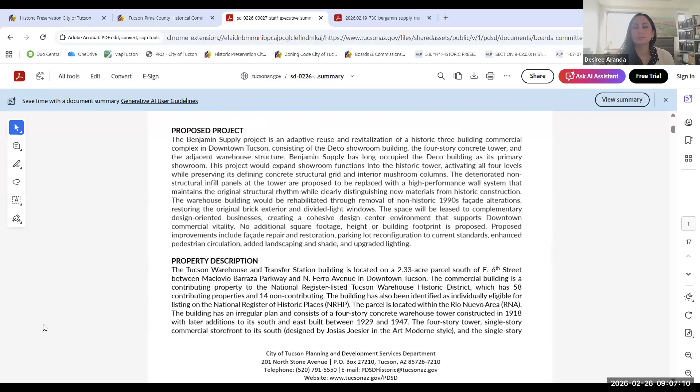Let me share my screen. This is our staff executive summary. It has a 4-story tower building, and also a kind of Art Deco, 1-story Art Deco piece. Can you see it now? Yes, okay, thank you, you're welcome.

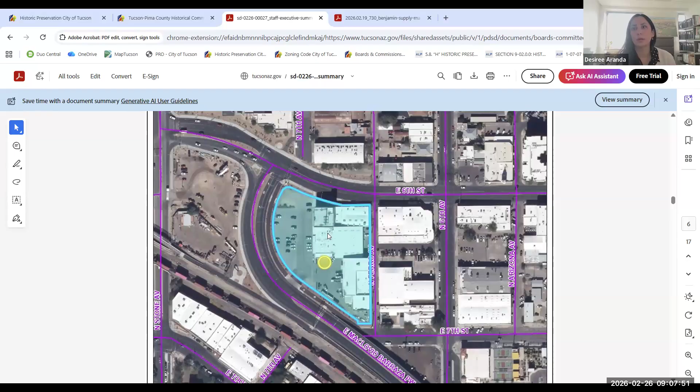I have some photos. Here's the parcel, as you can see the building is quite large. There were different additions added over time. This part here is the tower, which was the oldest part of the building, and there are different additions added over time. The subject pieces we're looking at today are this tower, this 1-story piece right here which was added over time, and then this commercial 1-story portion here.

We have the inventory forms also in the packet. Again, this is the tower piece we're looking at, and this Art Deco piece that was reportedly designed by Josias Joesler. There's the tower, and then this piece along 6th Street has been heavily modified over time, so we don't know exactly what it originally looked like, though we have some photos.

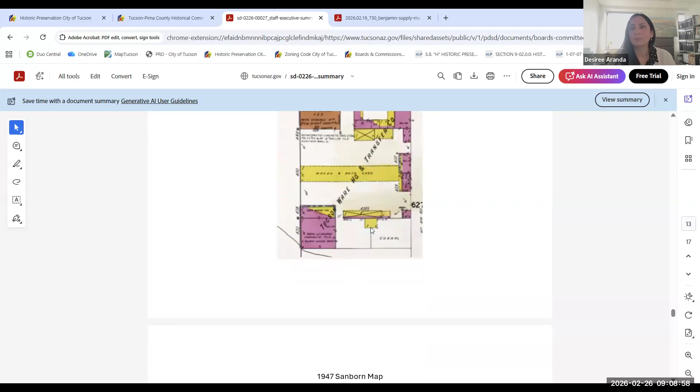Those are kind of the pieces that are not character defining, and we're not concerned about them during this review. This is the original inventory form, an older version. There are some Sanborn maps that show the evolution of this building. Just scrolling through - this is an image from circa 1929 to 1933.

This is that kind of commercial storefront that had been altered. 1950s and then 1994. 1999, I think that's the last one.

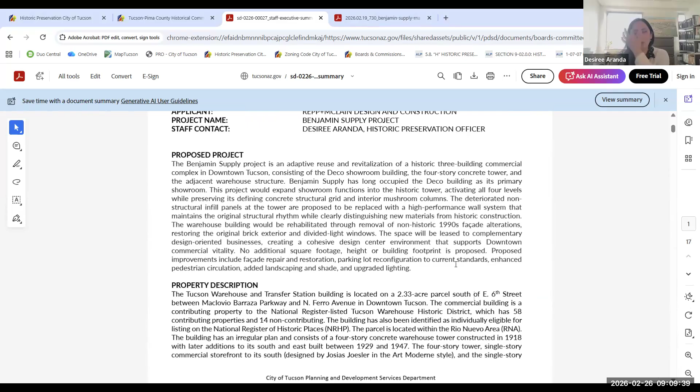So just wanted to give you a little bit of context for the building itself, what we're looking at. The project sponsors are here to present their project, so I won't go into all of the details, but I do have some comments maybe after they present the actual project. So I'm going to stop sharing my screen.

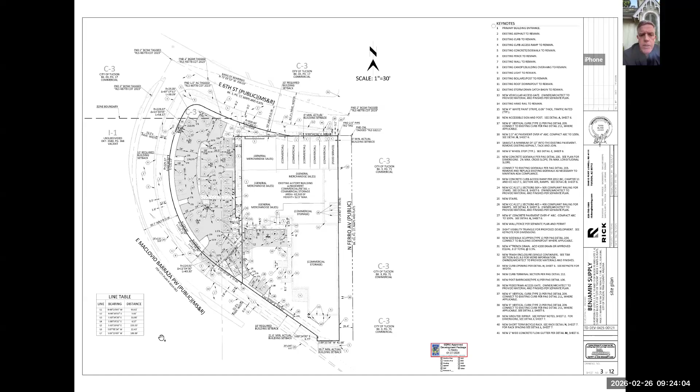Paige, Shane, anything else I missed on that would be helpful for these guys to know at this point?

I think you got that. Okay, great. Yeah, that was a great summary, I think.

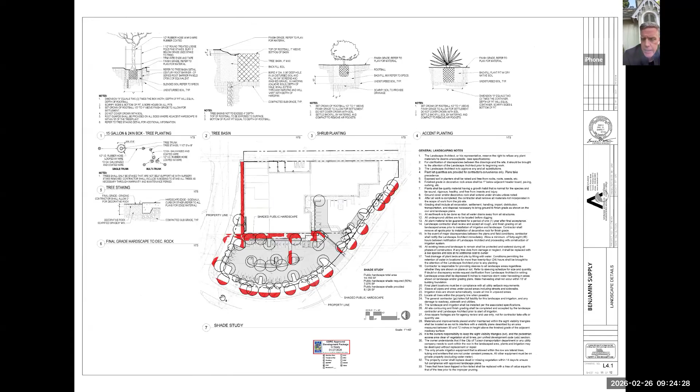Some of these other documents, this was the same document that we used for DRB as well as PRS, so you can see the shade study and some of the development plans and things like that. If you guys have questions on those areas, I'm very happy to discuss them. But I think you guys are probably more interested in the historic parts of the building.

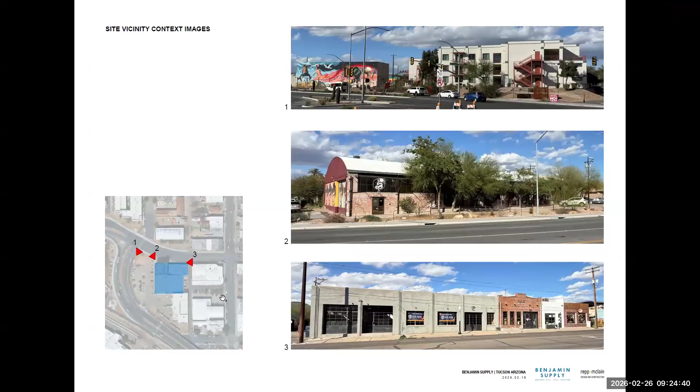Well, who knows what we might ask. But before I entertain questions from commissioners, Desiree, you had some comments.

Thank you. I just wanted to add or call your attention to a couple of things. As Rick mentioned, the work proposed on the kind of Art Deco single-story addition is mostly repair and repainting the side along 6th Street. The changes are more substantial, but there's also not that much evidence documentation on what we'd normally like for a restoration project. So I think the fact that they did some exploratory demolition was helpful.

I did have an informal conversation with SHPO as well, showing them the most recent plans, because this is listed on the National Register - it's not a local HPZ or HL. I did want to get their input, and it wasn't anything formal written up, just their initial assessment. They were not that concerned about those two one-story pieces. The area they had more questions about, or were more concerned about in terms of potentially losing its status as contributing, would be related to the glass windows proposed for that infill in the northwest corner.

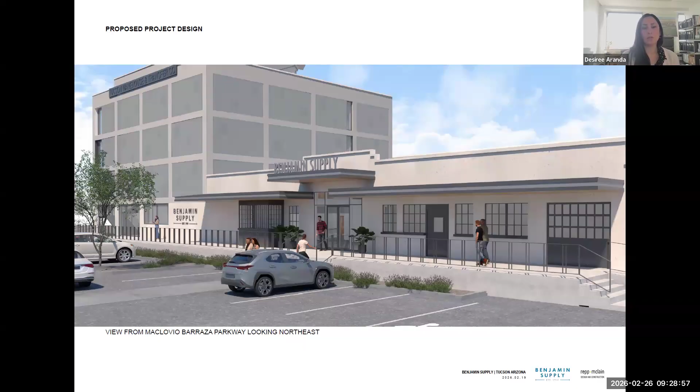Yeah, that was the other thing I was going to mention, the additional windows or changing of the fenestration pattern could take it to maybe non-contributing. And just for everyone's information, this is in the RNA, which does not require that a contributing status be maintained, but historic review is still required.

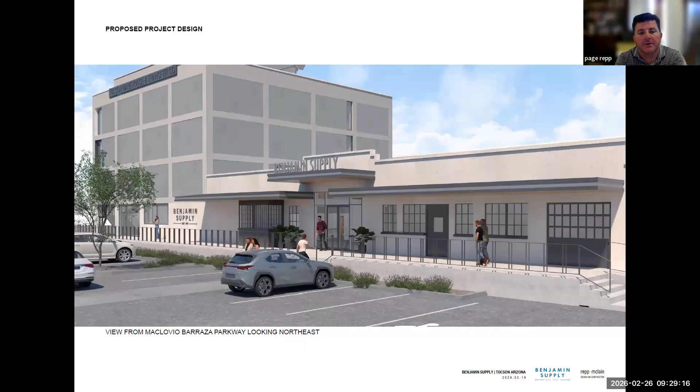One other thing on those windows, on that elevation the windows are behind the metal screen, and it's perforated, so you get the light, but from the exterior it recreates that monolithic nature of what it originally looked like.

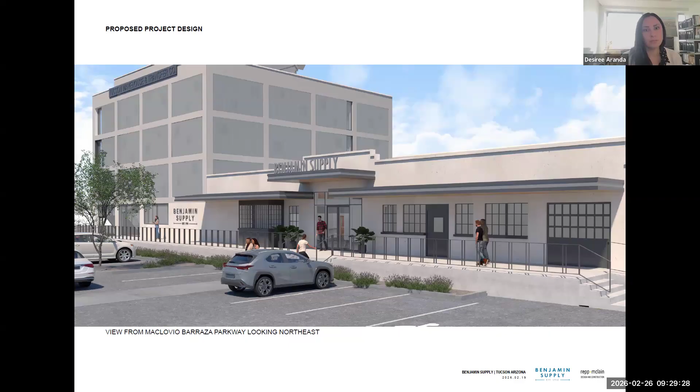Okay. Thanks for that clarification. So yeah, that's all I had. Terry, I'll hand it back over to you. Okay, thank you.

Commissioners, who would like to start? I mean, I just want to say that after all the city went through to list these buildings as part of a district, I'm hoping that your intention is to maintain its contributing status. Is that the case?

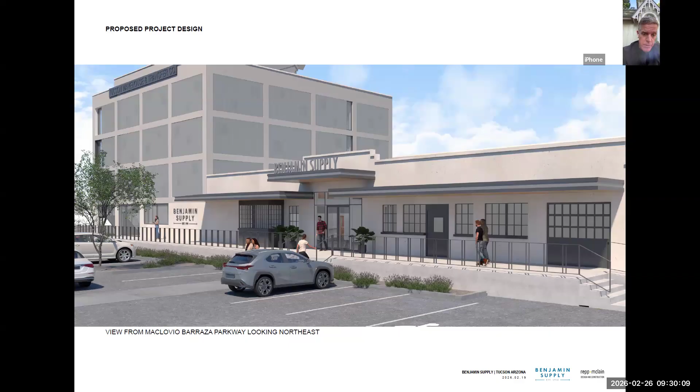Yeah, absolutely. We are hoping to maintain the contributing status on this building. We're just trying to find that balance between changing the use from a warehouse to retail and how we make this new business kind of viable in these existing historic buildings.

No, I understand that. And I have a question for Maria. So are we getting back in that cycle of DRB reviewing before PRS? Ms. Majewski, members of the PRS, no, the DRB is scheduled to review this project next week on March 6th.

Okay, perfect. Thank you. Okay, commissioners, who would like to start with questions? I can start off, Terry. Go ahead. Thank you. Yeah, thank you. This is a great presentation packet, by the way.

It has kind of everything we'd want to see in terms of the 3D renders and all of that, so thank you. I share Terry's concern, my predominant concern is that we can maintain the contributing status of this building. In Desiree's staff report, this is one of the historic districts where we have a growing number of non-contributors in the district. So we're not at a critical 50% threshold yet, but I don't want to get close to it.

And this is an iconic building too. So I like your rationale for what you've done. I understand the need to change use, and frankly, I'm pretty excited about it. I mean, when was the last time downtown had multi-story retail? Like 1980. So that's pretty incredible. I think if we have these broader goals of creating a livable, dense downtown, we need things like this. I think full activation of the building is great for its preservation versus 75% of it continuing to be mothballed.

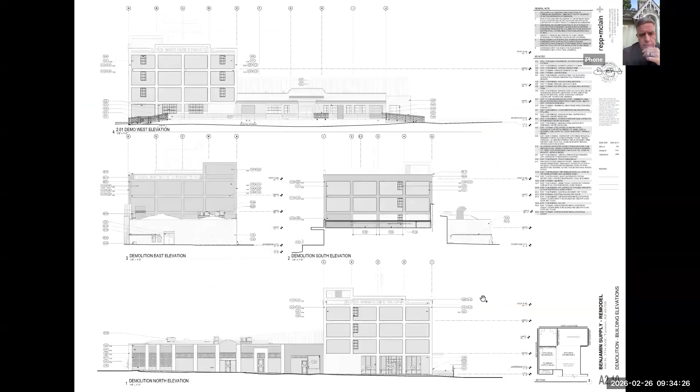Thanks, Savannah. That's the cornice work, and a lot of the little detail like that is kind of tricky sometimes to get into these kind of bigger models. But yes, the intention is to maintain all that kind of finer detail work that's on there.

Okay, yeah. And the only other significant feature, in comparing what it was before to now, is the punched openings, the windows that created a little bit of relief, a little bit of pattern on that fairly blank facade historically. So I'm wondering if paying attention to those, or finding some way to tell their story, would help with the argument of keeping it compatible or contributing.

Because what you've done is they're in pretty different locations, right? And they're kind of the full height of the bay, as opposed to what it was, a little more modest with the sill punched openings originally. Yep, they were certainly a little more modest with the sill. I can't speak to their original intention, but obviously a warehouse use is very different from the retail use in there too.

To follow up on the glass section for that corner opening, our thought process was that because it's such a predominant grid system with these infill panels, our reading and understanding of the two service bulletins from the Secretary of the Interior's Standards was that we should, rather than create a new proportion or scale or rhythm, let it have a singular punched opening on the same plane that exists currently, no trim, no ornamentation. So I think by having the glass be that full system, that helps maintain the existing grid system reading correctly.

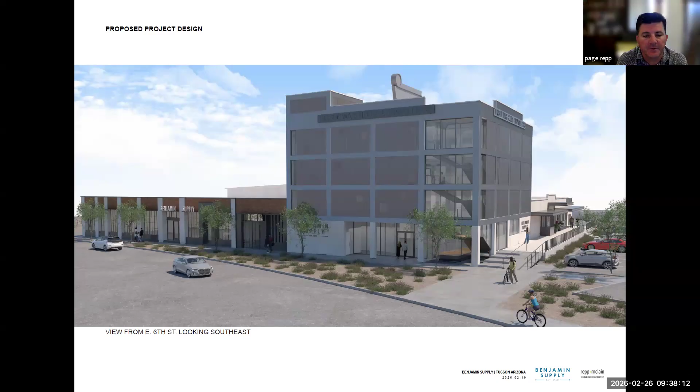Yeah, I think I like that. Peeling back that 90s facade, I think helps a lot. Revealing it looks good, looks better. That's all I have right now.

We'll listen to other commissioners, but thank you. Thanks, Savannah. Blake, what about you?

I have some comments, and I'm going to try to keep this brief. The way that this presentation led off seems to have triggered something emotionally in me, so I'm going to try to respond without letting that come through, and it will be something that I work on going forward.

The contributing status of the building needs to be the priority, that it maintains the significance and its contributing nature to the district as a whole. Of course, so I agree with Andrew and Savannah there.

As the landscape architect on this subcommittee, the areas of concern for me are limited because it's downtown, right, or downtown adjacent. So there's not a lot of historic landscape that needs to be thought about. But part of any landscape is naturally the view sheds of and from any structure and any site.

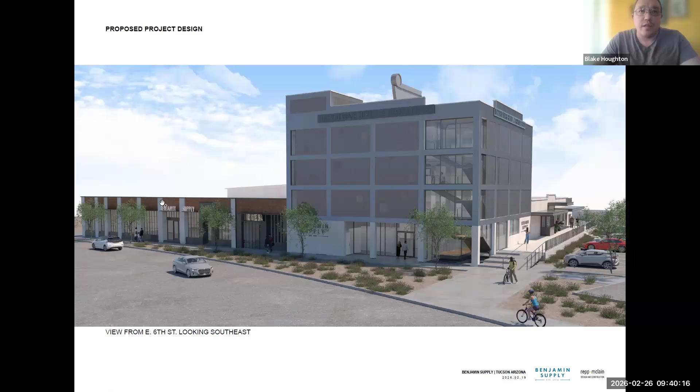What my biggest comment would be on is irrelevant, as it is the removal of a non-contributing feature that is already in progress. So that's what I have to say.

Okay, thank you. Commissioners, if we don't have other comments or questions, then I'm looking for a motion. Terry, can I ask one more? Yeah, okay, go ahead.

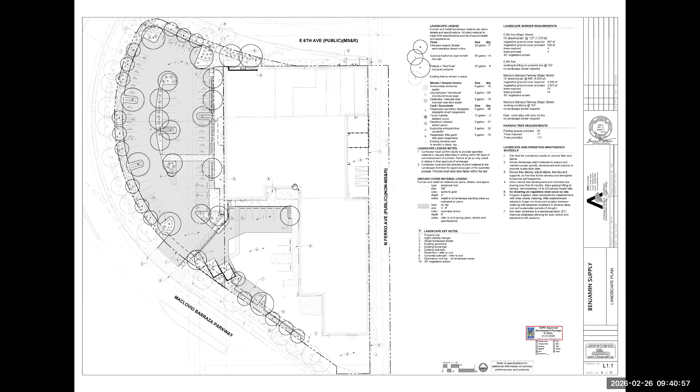Savannah had brought this up, and it was a good catch. On the northwest corner and on the northeast corner, from the inventory form, there were the kind of carriage doors that led into the bottom floor of the tower portion. They've been infilled since, but on the northwest corner, that cornice detail is still there. And then on the northeast corner, the jostle stones or whatever at the jambs of where those doors were are still present, where they stick out of the wall.

So have you guys done any kind of exploratory demo in there to see how those were infilled, and could they be opened back up again? The reason I bring it up is if we're looking for this transparency and getting more light and visibility into the building, those were the two primary large openings.

So I'd like to see maybe an effort to retain those elements, and maybe it's a glass infill versus a solid door or something. But I think for such a simple building, those are really one of the few architectural elements. And if we could retain those, I think I'd feel more comfortable that we'd have a shot at keeping the contributing status.

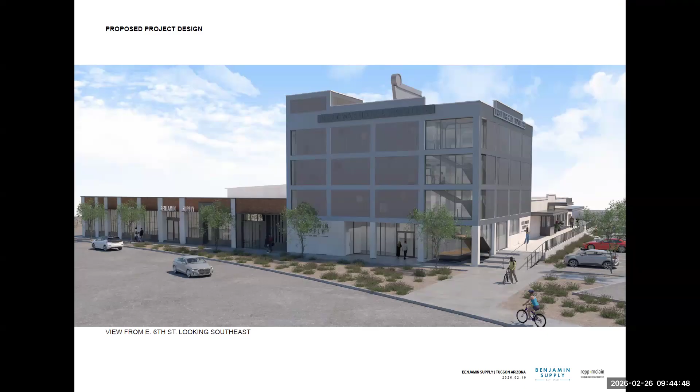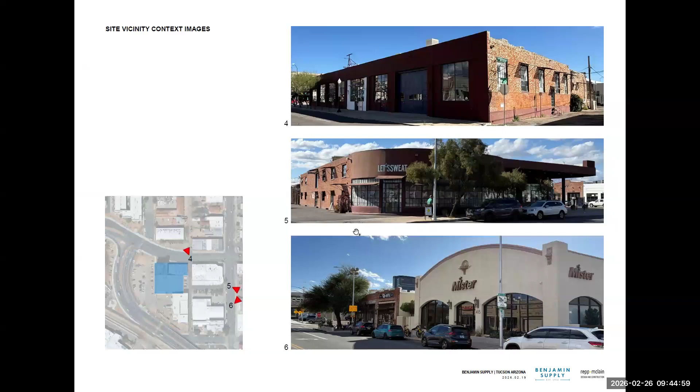Correct. Yep. The northwest corner one, the one that faces west, is that a similar situation, or is that one maybe more open? It looks like you're going to open it again and put glass in, but there's that cornice detail in the wall there that I think would be really great to keep. That was probably a primary entrance at some point. Yeah, it was hard to - yeah, absolutely. But I think per Savannah's comment earlier, that probably didn't quite make it into the model at that point, but it would be our intention to keep that piece in there.

Okay, alrighty. And then the sign on the roof, are you retaining that, or is there plans to restore it? Yeah, go ahead Paige. There's two signs up there. The large sign on the roof is in terrible shape, so we can't work on it up there. So we're going to remove it, lower it down in the parking lot, and we're having Jude Cook look at it to repair it, their initial look and restore it. Their initial estimate was that it's going to cost somewhere in the 6-figure range, but the owner's intention is still to bring it down, fully explore what it's going to cost, and if it's affordable, even if it spirals up to $185,000 or $200,000, their intention is to restore it and put it back up on the roof. So we want to keep that, and then the Tucson warehouse and transfer signs, we will restore those too. That is our intention. The signage is a huge part of the building, and if we can restore it, we want to. Did I cover that right?

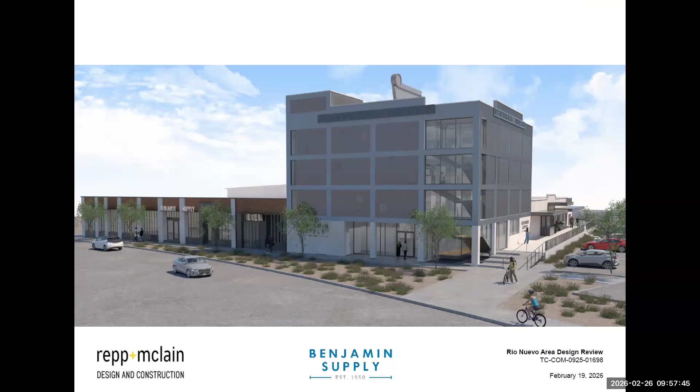Yeah, and I think we should always loop Desiree and her office in, so that applicants aren't continually sidestepping the HPO and going straight to SHPO. I think that's appropriate for Desiree to communicate with SHPO about the issue. So that's my thought on that.

And I think we do need to say other things in the motion, because Maria's going to want it right away to go to DRB so they have our feedback. So these smaller things that we're calling smaller details, I think need to be called out in the motion.

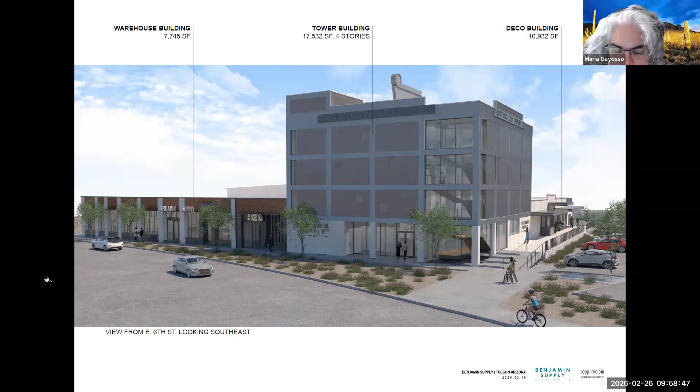Ms. Majewski, members of the PRS, and also a question for the applicant: if they go back to the PRS for a minor review, and if they provide those requested revisions today, if all that minor—if the applicant is able to provide the new drawings pretty soon, how quickly could the minor review be done? Could that be done prior to Friday next week?

Just so we're cleaner going forward with the DRB, I'm just trying to avoid going back and forth at this point. We can get them done pretty quick—it would probably be me or Savannah doing it, and I'll turn them around in a day or two.

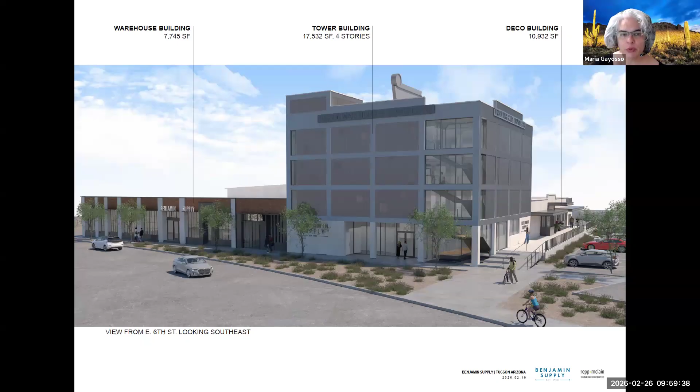Okay, great. So, Rick, Paige, we'll see what the motion comes up like, but if you could provide those revised drawings early next week, that would really help. Absolutely. Thanks, Maria. Yes, we can get those drawings ASAP.

That's not a concern at all. I did have one quick question, maybe a clarification, because this is a PRS review based on specific criteria. When I talked to SHPO, because we had other projects going on and couldn't find early information, she was helpful with research. She mentioned that since this isn't a listed property, SHPO doesn't actually have jurisdiction here. So I'm struggling a bit with the idea of SHPO weighing in on this, since I've never seen that be part of the criteria for a PRS review. I thought they were two separate streams.

Well, they are separate, but we sometimes request it. Over the years, when it's a serious issue, SHPO would be responsible if this building were delisted, that's a SHPO function. But Desiree, the historic preservation officer for Tucson, is a very important piece of this and is often a conduit for questions to SHPO, which tries to stay back from these decisions because we have a knowledgeable officer in her department.

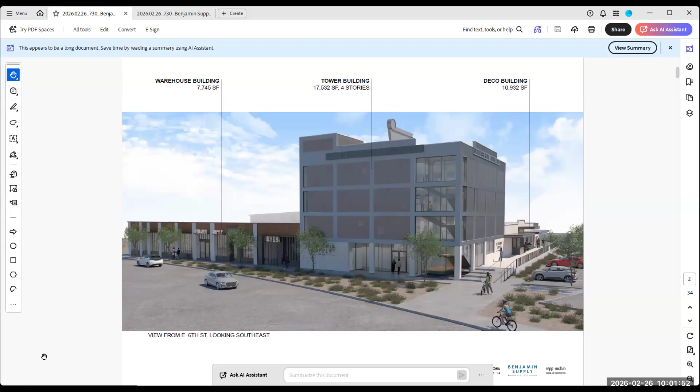So anyway, let's please make this motion because we have several other items to attend to. And just one last thing, Maria, this is a complex case. We only started hearing about it when a commissioner complained that things were happening to the building that we hadn't seen. We got this on the agenda quickly to make it easier for the applicant, since you've got it scheduled for DRB, but these are complex projects and we will not be forced to make quick decisions if we don't feel comfortable.

So, okay, Andrew or Savannah, someone please make a motion. Okay, I've got one written up. Let me just get the case number in here real quick and I will do that. Okay.

On the matter of item 4A, case SD-0226-00027/TD-DEV-0425-00121/TC-COM-0925-01698 at 440 North 7th Ave, I recommend approval of the project as presented with the following conditions: 1, the existing cornice detail and evidence of carriage door openings should be shown on the northeast and northwest corners, and revised elevations provided for minor review. 2, PRS is generally supportive of the new glazing system and infill walls, but the extent of new glazing is cause for concern that contributing status may be lost. 3, the applicant is encouraged to further discuss the glazing and infill strategy with the City Historic Preservation Officer and the State Historic Preservation Officer to ensure contributing status is maintained. 4, the historic rooftop sign location should be thoroughly documented before removal so it can be reinstalled in the future after restoration.

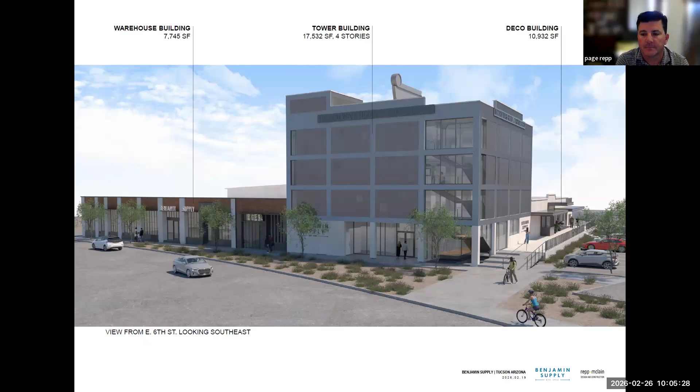So we will continue to make those arguments and pitch and present that case because we feel like the way we are presenting this is the correct way. And we just don't want this thing to be mothballed for eternity. I'm worried about our clients saying we'll ditch the second, third, and fourth floor. I think that's unfortunate if this thing just becomes an empty shell. But we'll see what we can figure out.

Well, it seems like everyone is moving to have these reviews as quickly as possible. I think you could mention to your client this is an important district, an important building for the community, and everyone's bending over backwards to make it possible for your project to move forward quickly. I'm sure they've been very reasonable, so I'm sure they will understand the review sequence.

So, okay, well, thank you again. Go ahead. Now you have PRS approval, so you're one step closer. I feel like we're just... Right. Yeah.

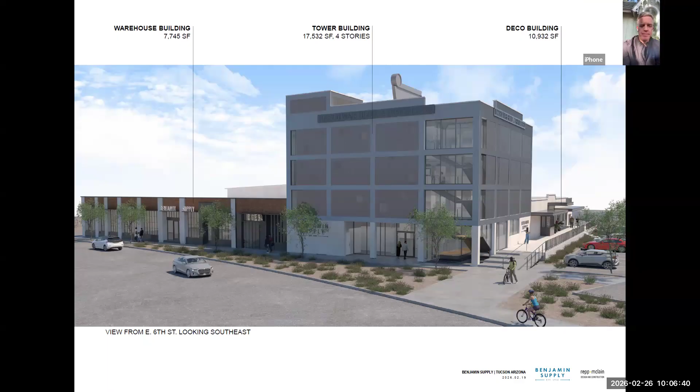Okay, let's move on to item 5, which is historic landmark nomination review. 5A is TC-COM-0226-00203, 255 West Alameda Street. It's for Tucson City Hall. Jason, it looks like you are the contact on this.

That is correct. Thank you, Terry. Could you give us a presentation? Desiree, would you please enable me to share screen? Terry, I know we're running short on time, how much do you want me to keep this down to? I have a slide presentation, but I can cut it down to whatever time remaining you feel we have left. Well, when does everyone have to get off? I was hoping our meeting would be an hour and a half today, but if we need to move this forward, we need to move it forward. How many slides do you have?

26. What do commissioners desire here? I'm okay on time, I got someone to cover my 10 o'clock, so I'll defer to others. I have till 10:45, I have to get to campus. Okay, that's good to know. I think we need to go because we have another informational item and we need to wrap up. I appreciate everyone being on this meeting earlier in the day. So yeah, thank you. Okay, well, if you can zip through. I will do my best, I will try to keep it a brief history of City Hall rather than a forced march.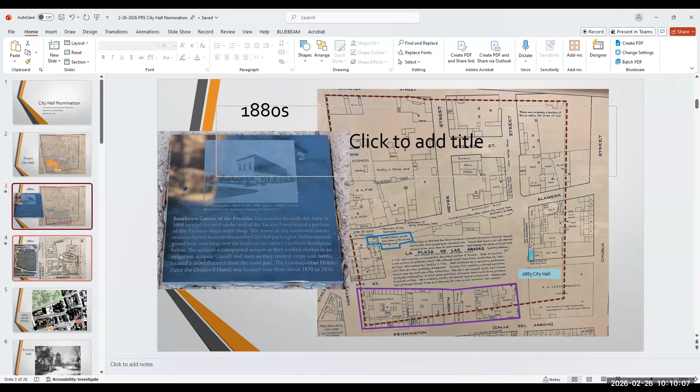Looking to 1883, where the 1916 City Hall once stood, before that was a Presbyterian church, as the plaque shows, and then it was sold to a Congregational church. I'm showing this in relation to where the City Hall was in this bigger area, but this Congregational church and the 1916 City Hall site is not part of the parcel we are looking at for the nomination.

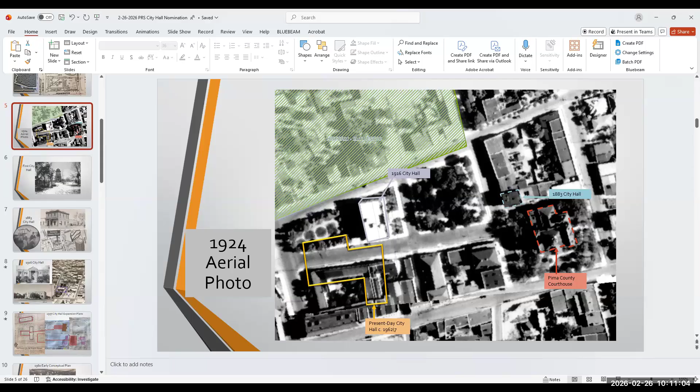Moving forward to the 1924 aerial photo, I've tried to outline it in yellow gold the best I can. What is shown in light purple is where the 1916, 1883 City Hall was, and you can see where the Pima County Courthouse is. This 1924 photo is right before Pima County decided to demolish all the existing structures and build the structure we know today. There's a street running through it.

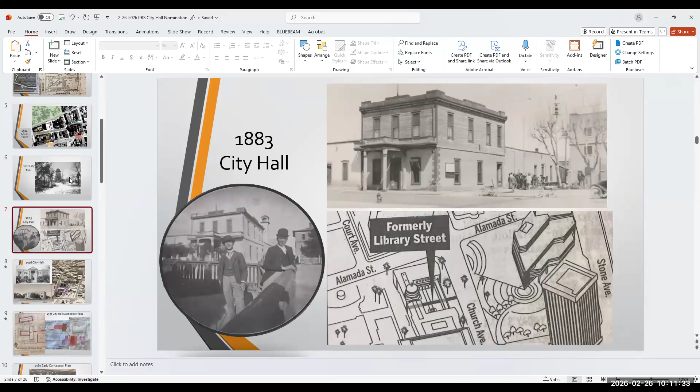This, if you remember, was highlighted in blue, the 1883 City Hall. I found in the lower right a newspaper article where that street running through shows people congregating with bikes to the side. It was called Library Street. It is now the walkway between the Pima County Courthouse.

So then we moved to the 1916 City Hall. Again, as I was saying, this is the parcel that today's City Hall is right adjacent to, but the 1916 City Hall was sitting on a different parcel, and this was demolished once the complete Tucson City Hall was built and everyone could move their offices into the new structure.

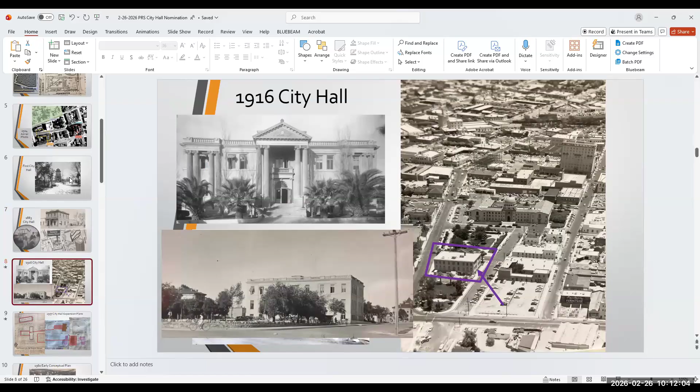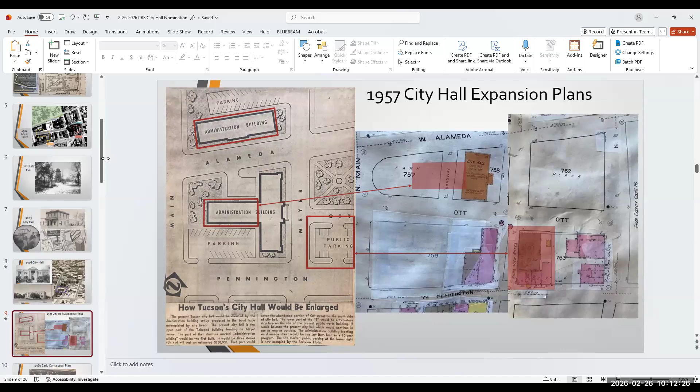Moving on, this is just a little background: at one time in 1957, they had thought about taking the existing 1916 City Hall, building a wing extending to the west, and then building an administration building across from it on Alameda Street. These plans did not go through, and this was through bonds.

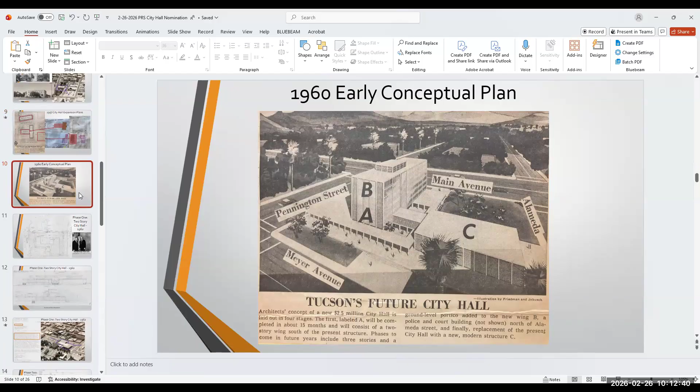Now, the bonds did go through, and we have an early 1960s conceptual plan. The building labeled C was to build a new structure using the old site of the 1916 City Hall.

Moving forward, here's the plans from 1962. You can see the City Hall, there's Sunset Park, and where my cursor is, you can see just how close the existing City Hall was while they went and built. I'm using my cursor to go around it.

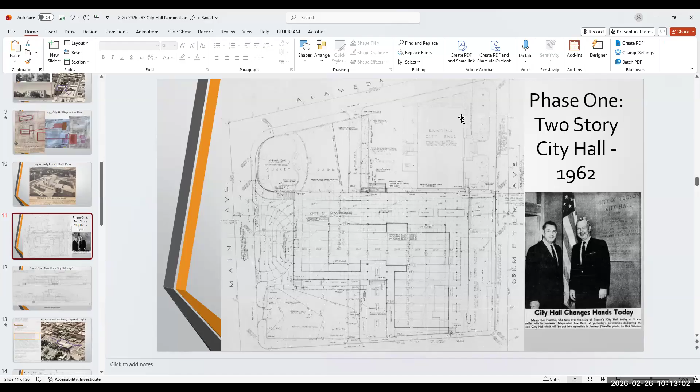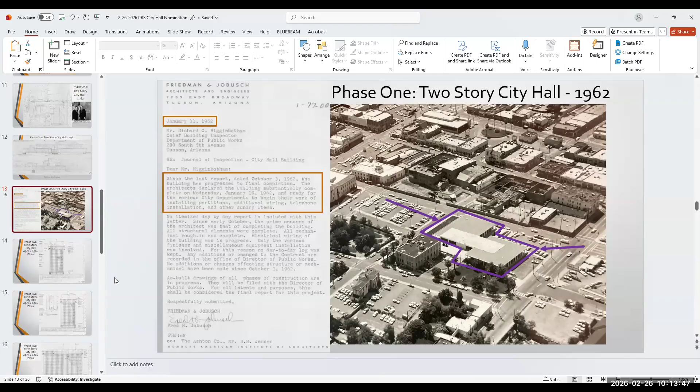Here I have an aerial photo where you can see how it was constructed. It did take a number of years between 1962 until we got to the tower that we now see today, which was finally approved.

And so here I have elevation plans. These were approved April 1st, 1966. We're looking at the west elevation. This is what we see currently today.

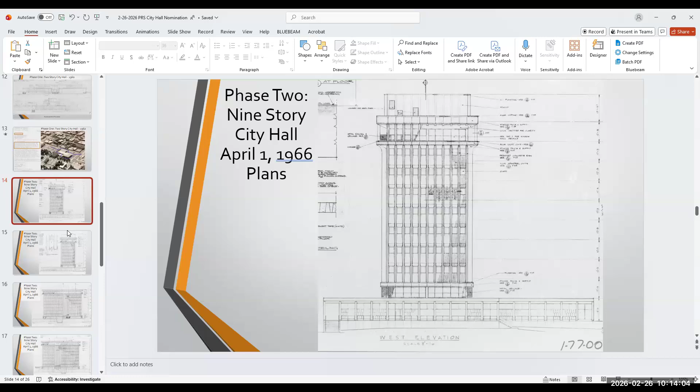This is your east elevation. This will be the south elevation. And the last one will be the north.

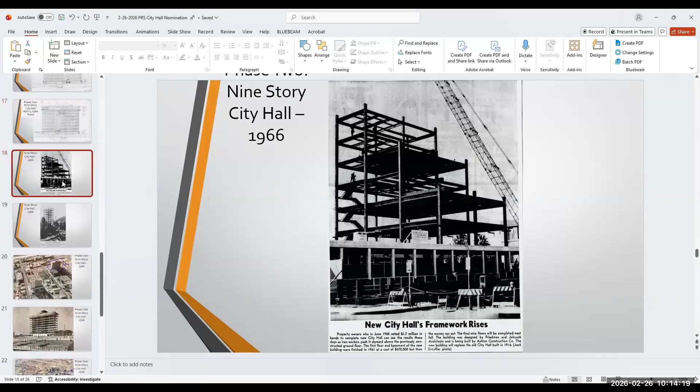Now these are the plans. I have historic photos of the steel framing going up and the construction of the 9-story tower. I have some aerial photos too. You can see how it's being built adjacent to the existing structures.

At the same time, I'll mention that urban renewal funds started to take away some of the old buildings here, extending to the south.

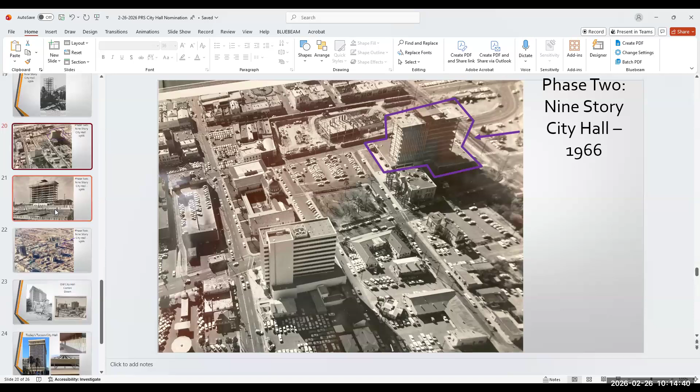This would be looking to the northwest, showing the old buildings demolished during urban renewal. Here's a colored photo, shown enlarged, where you can see the urban renewal area; the Tucson Convention Center will be out here.

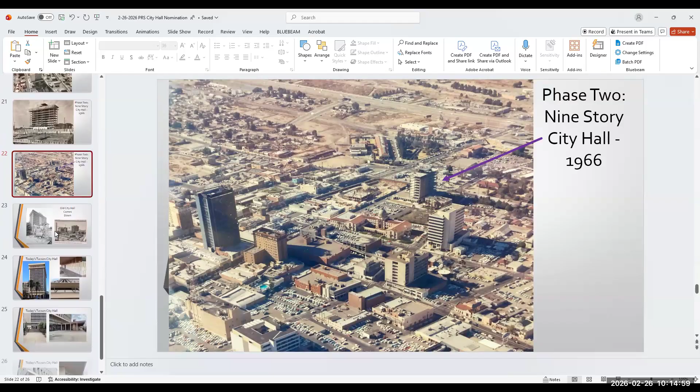Once they had finally completed construction, I found historic photos of the old 1916 City Hall finally coming down. I found a newspaper article that even though there's much nostalgia about it, they said it stunk because it had so many problems and issues since it was first built in 1916. Even though they had nostalgia, they were happy to move forward and have something new and modern.

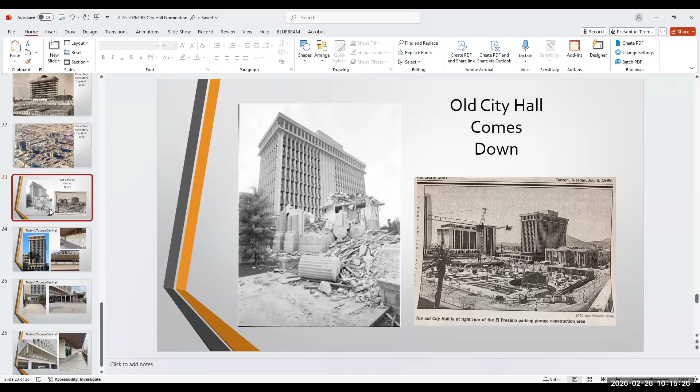So going back to the December 11th, 2025 PRS meeting we had, there were some concerns and issues raised regarding some of the architectural features, so I have those enlarged.

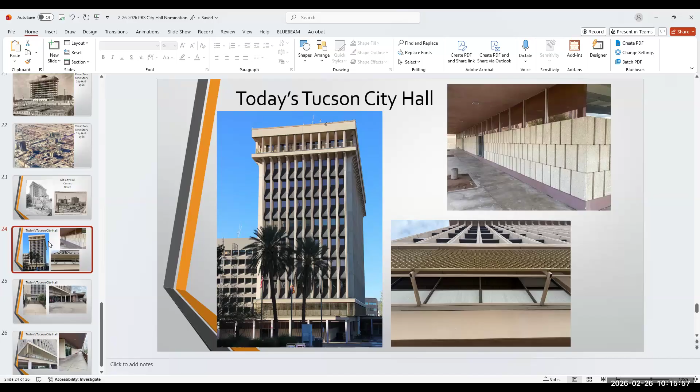What we are seeing in the upper right-hand corner is a cast stone fascia, according to the plans that were mentioned. I have a photo looking up at those anodized rings, and you can also see those aluminum windows with the mullions. I have other photos that will show this a little bit better.

The image on the left shows the parcel, which has a small segment that juts out towards Alameda. This is looking at that parcel with the acorn Steinfeld street lamps leading up to the entrance of City Hall. The last image shows the aluminum windows with mullions, the anodized gold rings, and the cast stone fascia.

I'd like to bring out a summary of the character-defining features. It is an irregular plan, 10 stories in height, horizontally oriented with a 1-story ground floor and a vertical 9-story tower. It has steel beam framework, cast concrete construction, cast stone facing, stucco fascia, covered walkways with concrete floors, and ground level lobby entrances at the north and south.

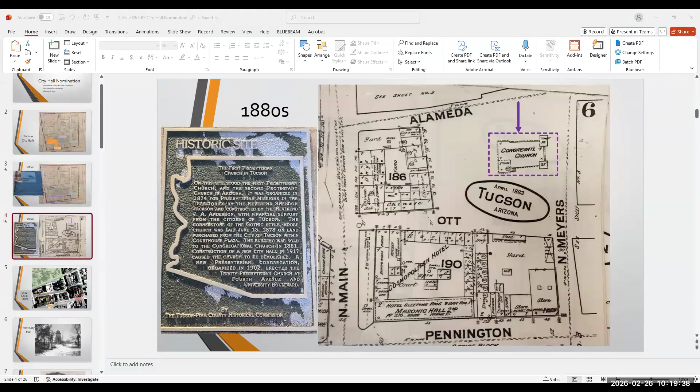Okay, let me see, I have an image for it. It's in the packet if you want to pull it up, or I can also share. Let me go to it, there it is, and let me throw it on screen. If you don't see it, I'm going to need to reshare screen. Yeah, you'll need to reshare, I think. Okay, give me one second.

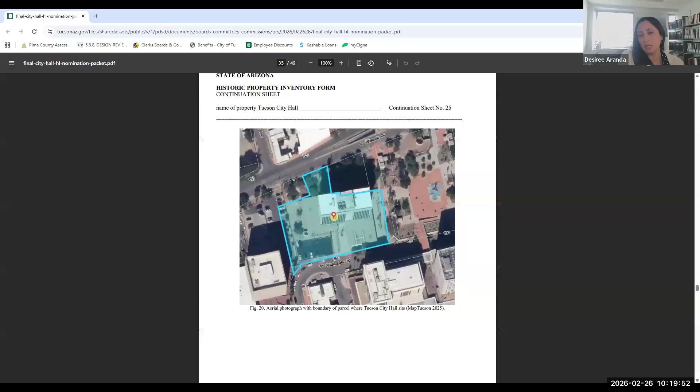There we go. While he's sharing, I'll just say generally speaking, historic landmark boundaries are the parcel because it's a rezoning of that parcel, so it's an overlay of whatever that zoning is. If we were to expand beyond that, we would be expanding into other parcels. In conversation with department leadership, and also based on the period of significance of that building itself, it makes sense from a historic preservation standpoint to keep it to that parcel, because anything beyond that would require conversation with mayor and council. That wasn't the direction, to expand beyond this parcel.

Okay, very good. So that little northeast parcel, where the former church and former city hall was, is separate. And I think it was called Sunset Park in the original plans, on that northwest corner, is also separate. Yeah, so they're separate parcels, and they've also been altered over time. As we took a look, there really isn't anything from the period of significance that's left.

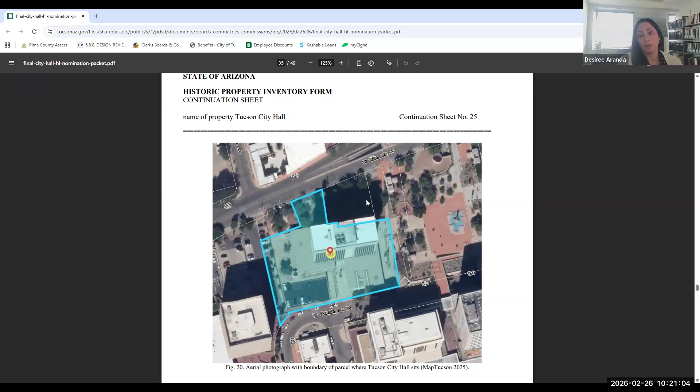Okay, so I have a question before you continue, Andrew. Is it because of the perspective of this drawing where the building is set that the boundary encompasses the entire building, or is it just the way this looks? Yeah, it's not totally accurate, but it kind of reflects the limitations. The whole building would be included.

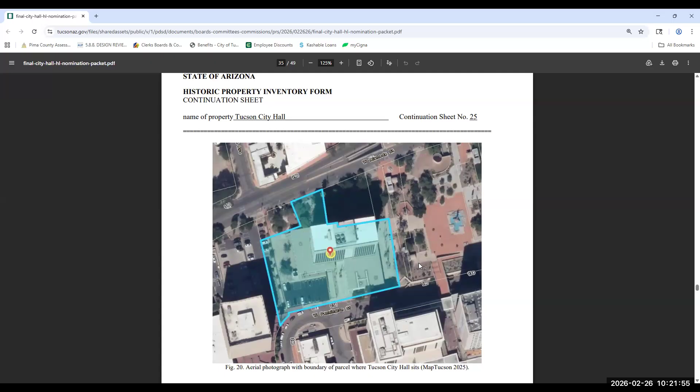It will be, and this is taken from the parcel lot lines that are on Map Tucson. This blue outline was trying to trace out that outline. But is it confusing to have it cut off part of the building just in this particular view? This image is confusing because of the way I had the shape file and the image below it. In the nomination form, maybe there might be a better one.

The building also, as you see, we're kind of looking from not a direct viewpoint. We're at an angle, so that building does get blocked off. I believe where the blue line was going, I was following the parcel lot lines, because you can see these white ones - that's what I was following.

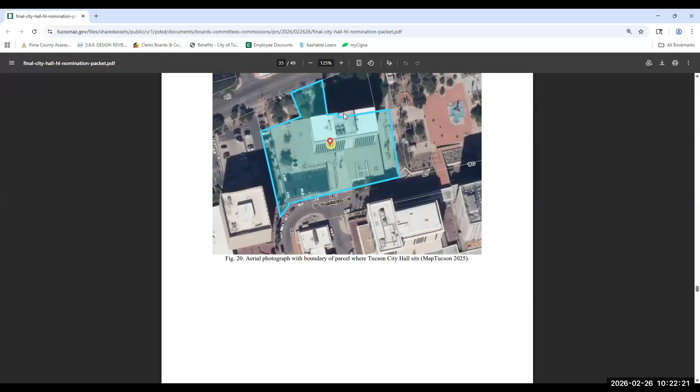Yeah, it's just how Map Tucson generates it. It wasn't hand drawn, and when it goes through the rezoning process, there will be more accurate maps produced. That's just kind of what we have available to us right now through Map Tucson. Maybe you should make a note of that though, because it's very confusing to anyone just looking at it. Understood.

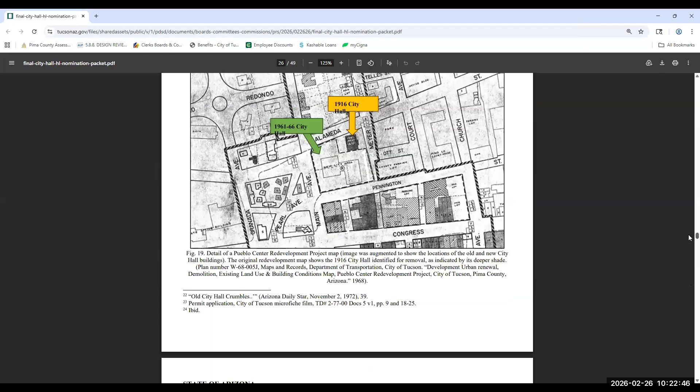Okay, I'm sorry Andrew, did you have any other questions? No, I think that was it. Great job, Jason, thank you.

Okay, who's next? Blake, how about you? Yeah, I will second Andrew's comments. This was well researched, it looks great, and I enjoyed reading through it.

I also just want to say, Jason, coming from a grad student who did a lot of presentations and had to crunch some stuff that I felt was important down to fit in a timeline - that was a great presentation, and I thank you for zipping through that. You did a great job. Thank you very much, thanks for that.

I did have a little bit more images that would appear within slides, but because of the time crunch I just skipped over. I appreciate that. Thank you. Thanks, Savannah - yeah, it was very thorough.

Thank you, Jason. But I was trying to understand - I'm looking at the same boundary map that we have, and I understand we have what we have for the inventory and that it will be refined through the rezoning process. Is that the main entry there where it juts out to the north? That is correct, yes.

So it's like a hardscaped element. I know you guys walked it. I have a picture here on the slide, but I need to reshare screen. Go ahead, yeah, please do. Okay.

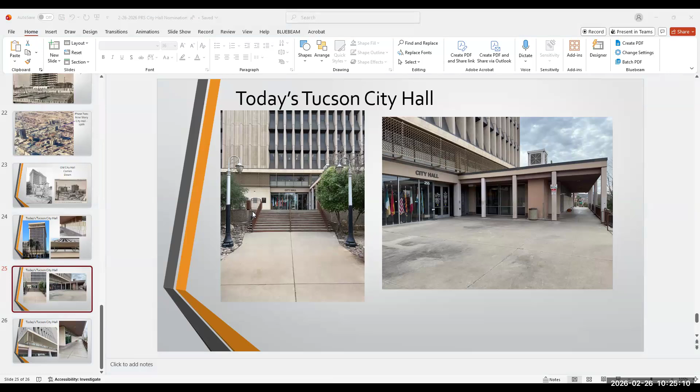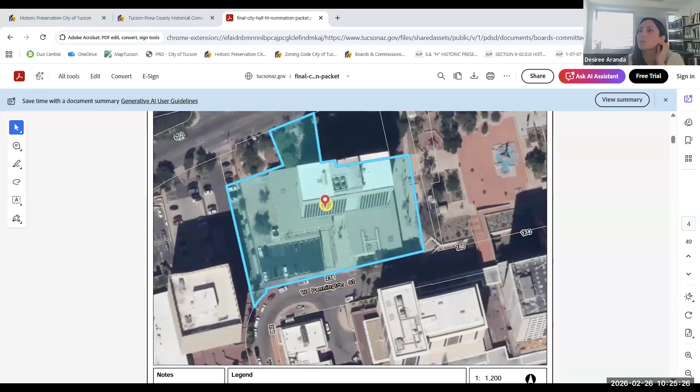So it includes a little bit of landscape on either side of the main way? I would say it's just the handrails and the street lamps with just the rocks. Maybe we can share the inventory form, because we do have photos in the inventory form of kind of the site, some of the site features, at the end.

What I was going to try and do is bring up the actual parcel on Map Tucson. Yeah, you can do that as well. Let me throw that up on the screen one second.

So yeah, some of the site features that we added to the nomination are the concrete kind of surround - it really is just hardscape area. When you look at the historical images, there are planters. There's no plants in them, but there are planters.

Does it seem to include it - does it project a little bit into the east, right? So that whole area, is that mostly paved, hardscaped area to the east? Yeah, there's some stuff to the east there. This is a concrete walkway, and there is a monument to a soldado that's right about here.

Okay, we have some photos. I'm going to share them really quick, because I think photos might be more helpful.

The stairs, the steps, would be considered a character-defining feature. These retaining walls, these steps, the metal railings, these walls, I'm forgetting what it's called—aggregate stone, if that's what you call it.

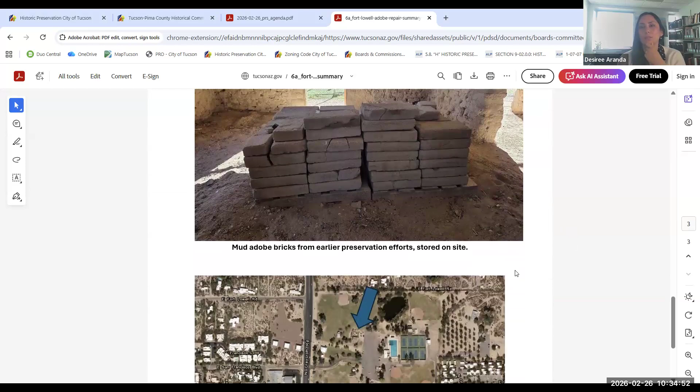So here's a map showing the area. Here's Craycroft Road, so this is kind of in the main park area. Again, that's the hospital, and a portion of the hospital is covered, protected from the elements to a certain extent. So that's this area.

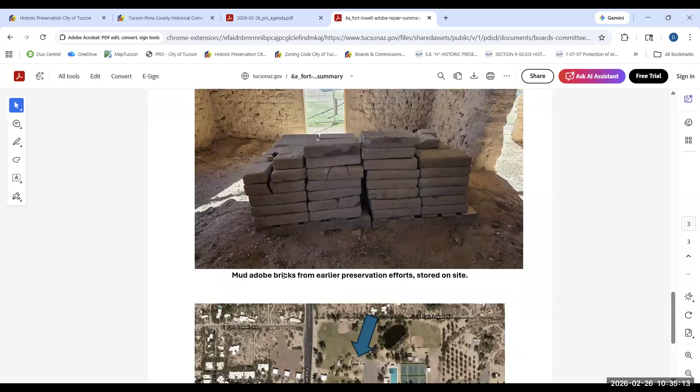These are old mud adobe bricks from earlier preservation efforts. I don't know if we'll find a use for those, but this is considered repair. We did run it by SHPO as well, and they're supportive of this and supportive of Chris leading that work. He's led other types of adobe workshops at Fort Lowell Day.

In the past, he led activities like adobe mud making with children. He approached us last year with this thought of, it would be great to do something similar, but it would be really wonderful to actually work, put that skill and time to use, actually contributing to some maintenance of adobe. So that's basically the project.

It will be out March 28th, which is a Saturday, from 10 a.m. to 2 p.m. So anyone who wants to join is welcome to. If you have any questions, let me know.

Thanks, Desiree. I just wanted to comment for everyone's awareness that I worked a lot with Chris Schrager at Empire Ranch when we worked there for many, many years. He's a good guy, he knows his stuff. It seems great that he is, I assume, volunteering or at least doing this, and that the city's involved, showing its support. And I think it's great.